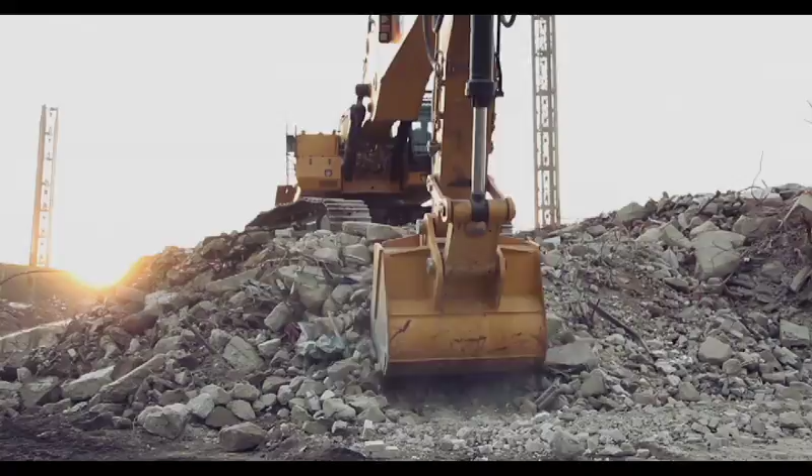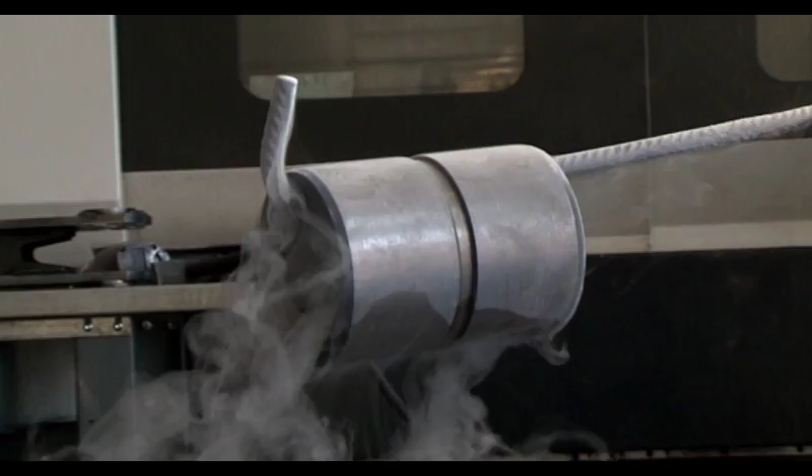The story of Alcar is one which has deep roots ingrained in the best of Italy, that which invents and innovates. Alcar is the result of the fusion between CTM, Costruzioni Termomeccaniche Meridionali, with Alcar S.p.A. of Valle in 2005. Two companies who have always associated their name with mechanics and light, medium and heavy mechanical and metalwork fabrication.

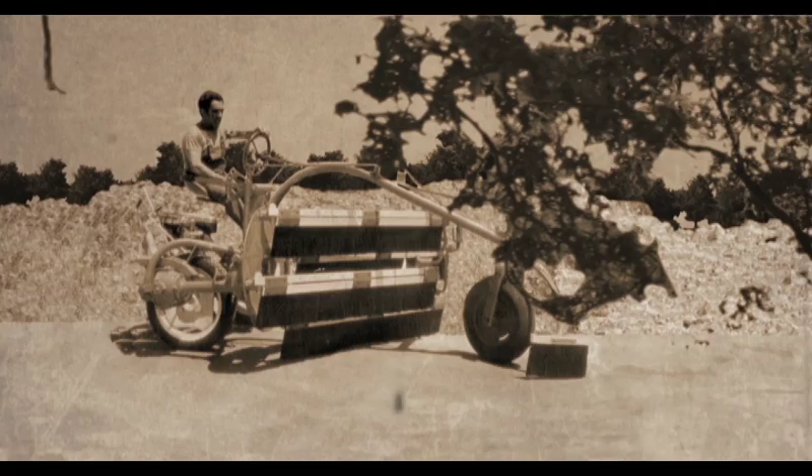CTM has manufactured conveyor belts, cranes and special machines for processing tobacco and the collection of olives in Puglia since 1960, over time becoming one of the main suppliers of Fiat Allis, today's CNH.

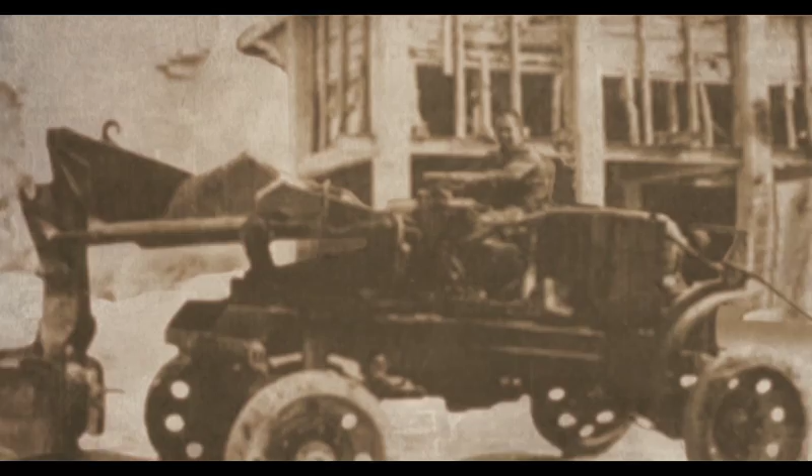Alcar S.p.A. belonged to the Bruneri family, a family which eternally linked its name with the world of earth-moving machinery. It was the Bruneri brothers who invented the first fully hydraulic excavator in the world in 1948.

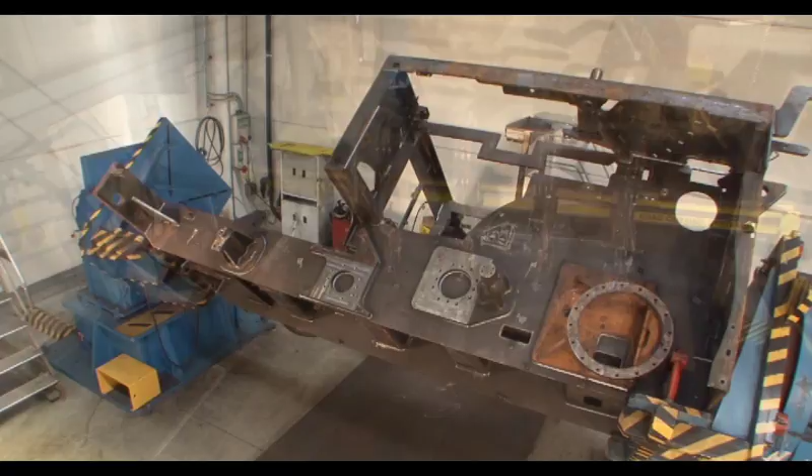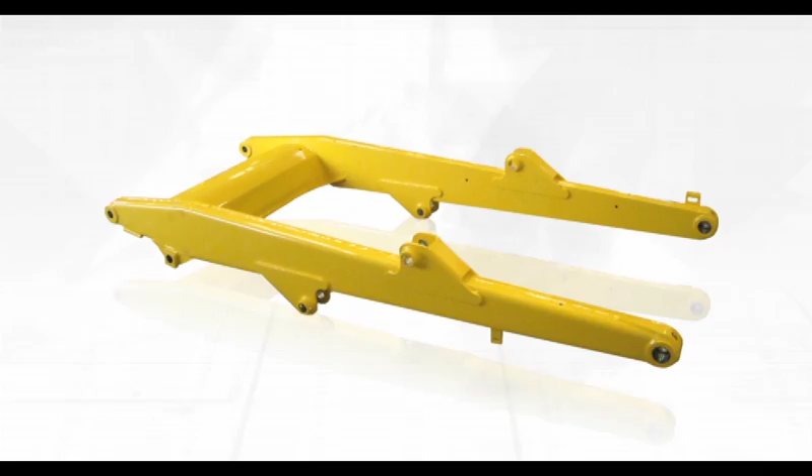Today, Alcar has become one of the European leaders in mechanical and metalwork fabrication for construction site machines. This is the only company in Europe which has a complete internal production cycle. In this manner, any component can be designed and realized independently for our clients.

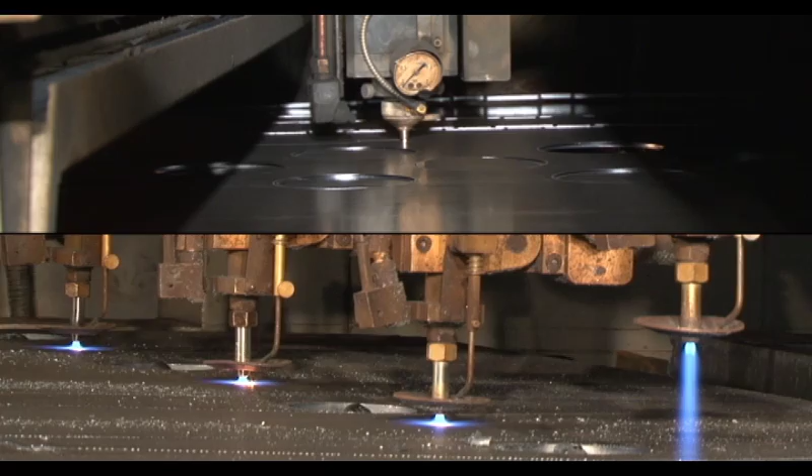But let us proceed in order. Today, Alcar has two plants, one in Valle, in the province of Turin, which manufactures the light mechanical and metalwork fabrication, and one in Lecce, which is for medium to heavy mechanical and metalwork fabrication. The internal management of all of the productive processes, together with the ability to design each component and each processing cycle, has created a virtuous circle.

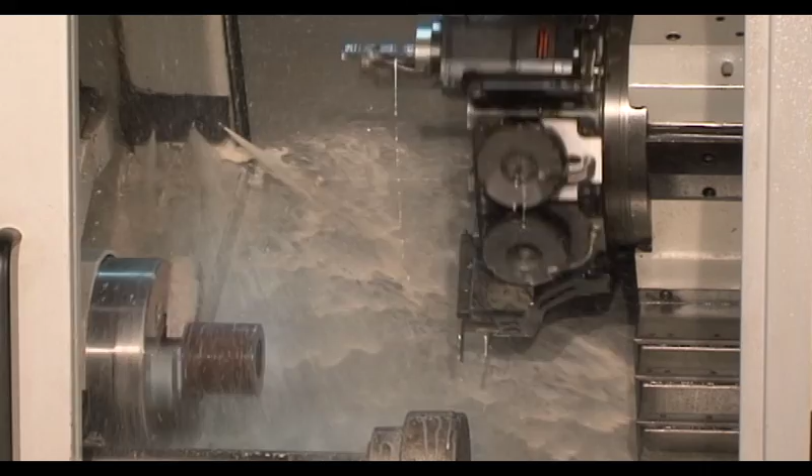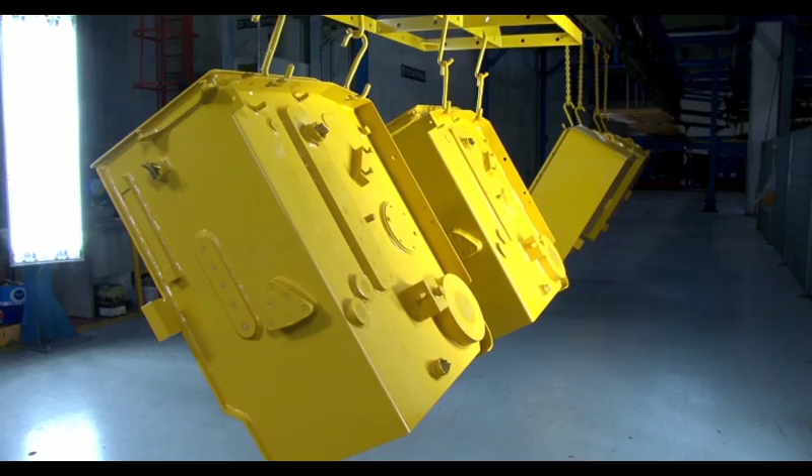On this path of continuous improvement, the increasing expectations of the clients, who are leaders in their own sectors, meet a continued and positive response. Today, Alcar counts CNH, Fiat Group, Caterpillar, Liebherr, Olot, Turk Tractor and Sampierana amongst its clients.

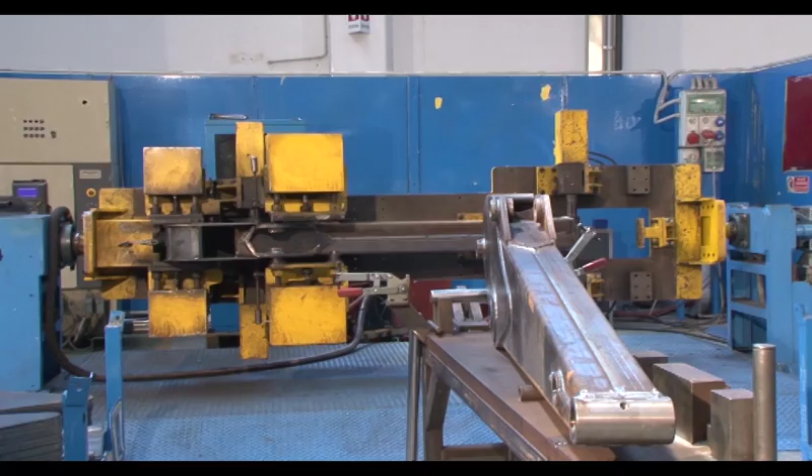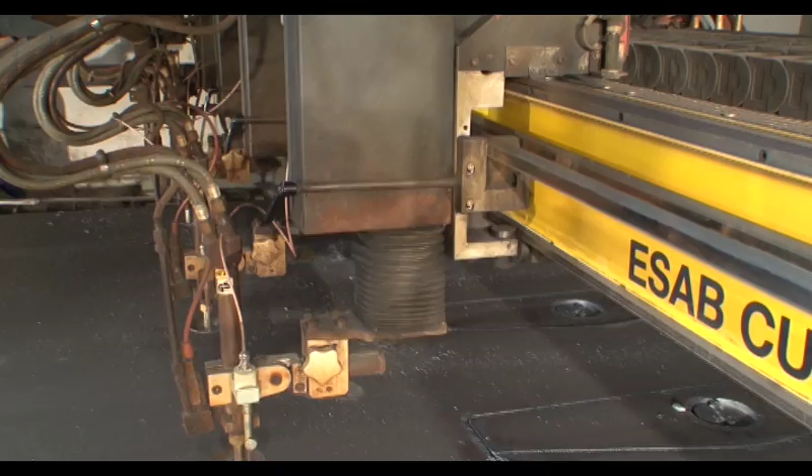In today's markets, which are always challenging and dynamic, Alcar has demonstrated that it knows how to start and above all modulate new productions thanks to a continued interaction between its design department and that of its clients, creating co-design and co-engineering activities. It often occurs during the research and development activity that Alcar not only flanks but substitutes its client, releasing them from burdensome and complex activities.

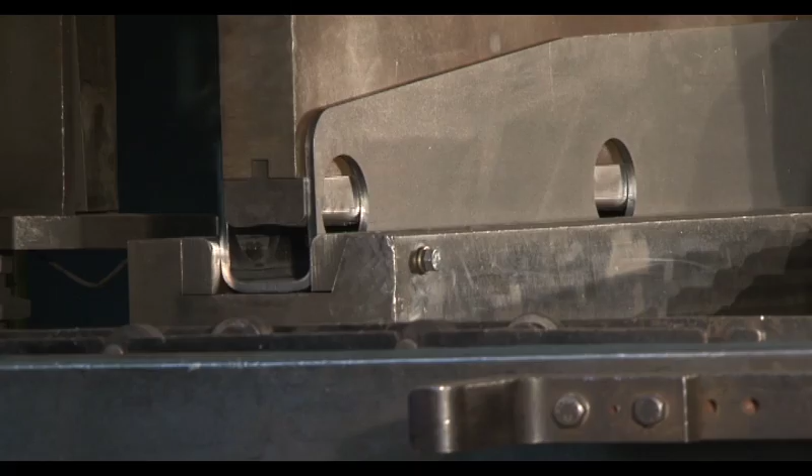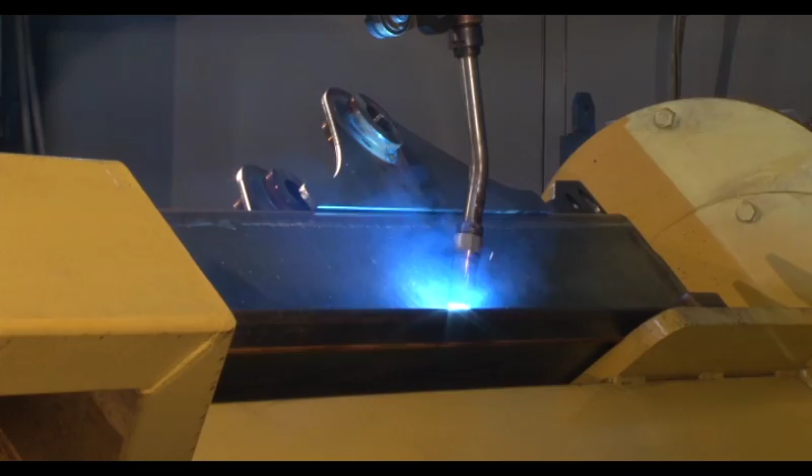The possibility of internally managing each work cycle allows the production times and costs that are positively influenced, simultaneously increasing the level of quality of the finished product.

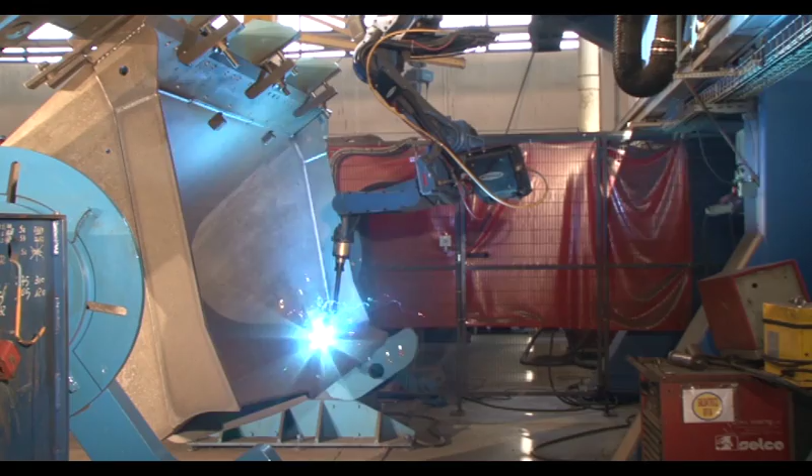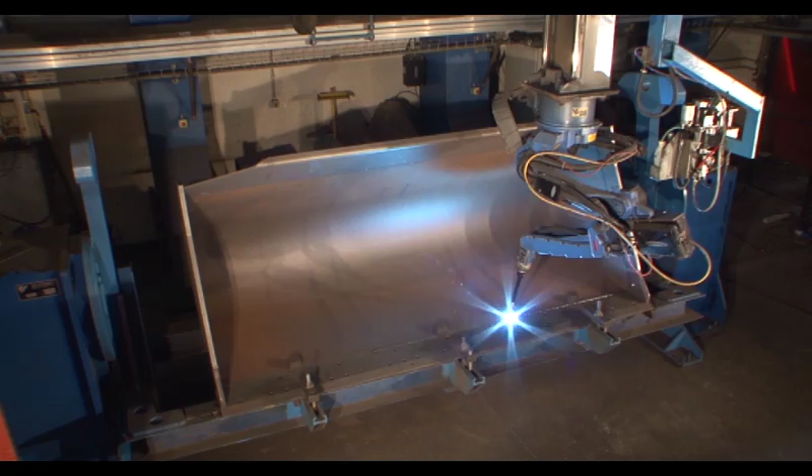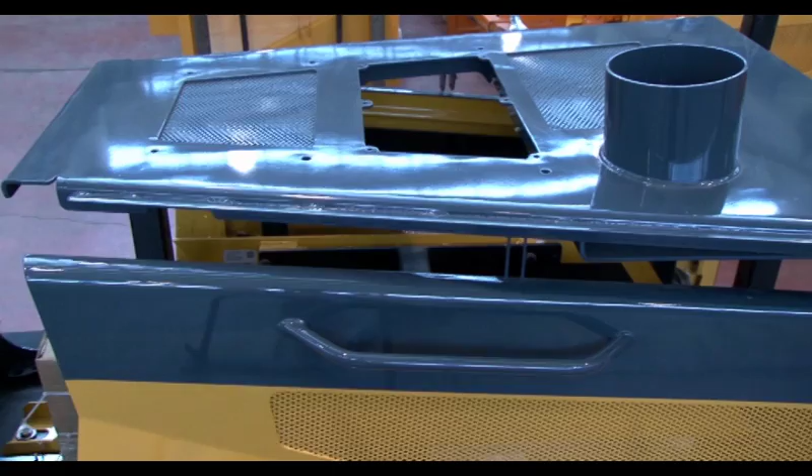The Six Sigma methodology is constantly applied in Alcar and guarantees excellence in service from the point of view of continued optimization. The core business of the company is supplying clients with the finished component, painted, ready for assembly on their lines. The level of enrichment and the component service connected to the products which exit the Alcar plants on a daily basis have reached heights which were at one time unthinkable.

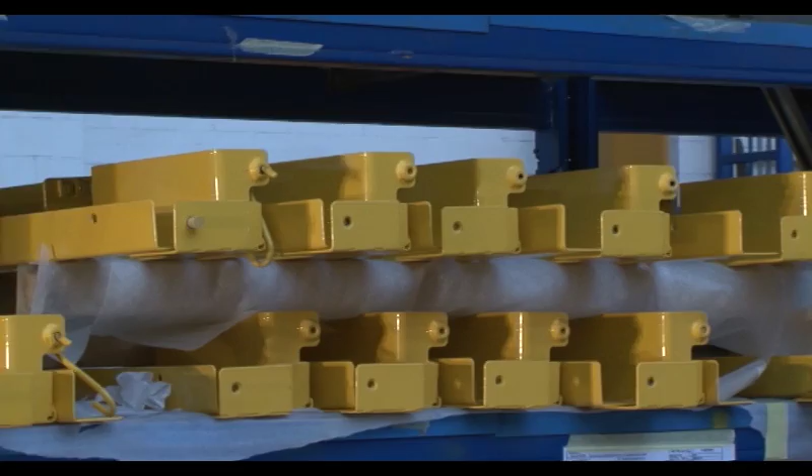The technology present in both plants is mutually integrated. Today, Alcar is the only European company able to supply mechanical and metalwork fabrication components which range from the structural to the mechanical and metalwork fabrication bodywork and tanks.

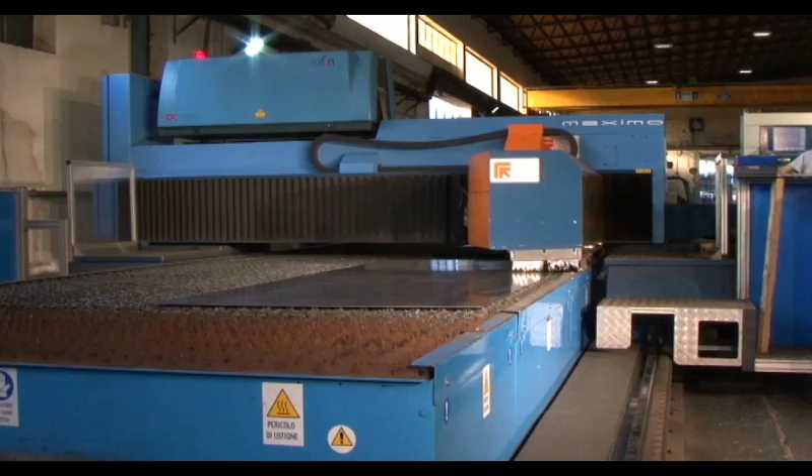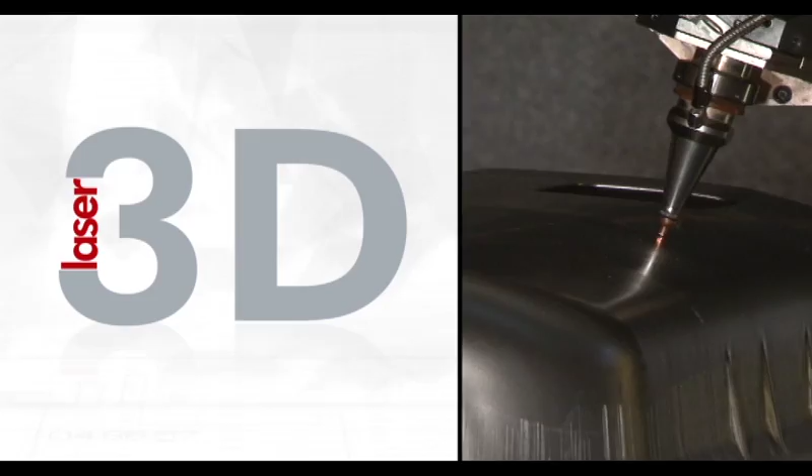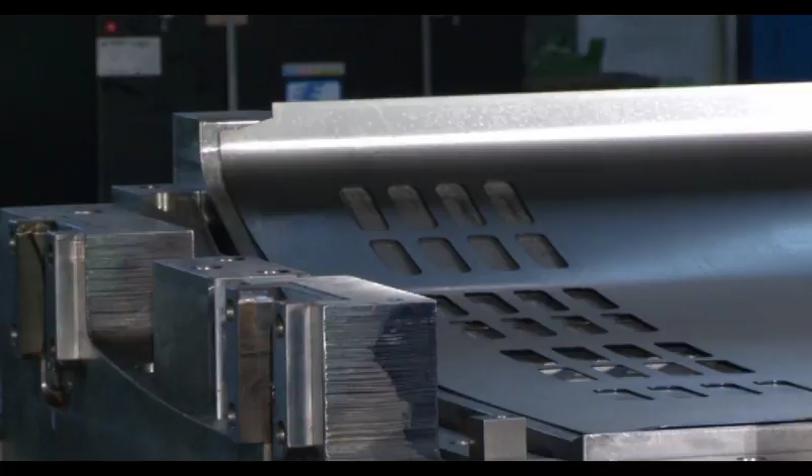Let us look at all of the productive processes in detail. Defined as the production cycle, the process starts with the preparatory phases of the raw material. This is followed by the cutting of the plates, which, depending on the thickness and the characteristics of the product requested, is carried out using different types of technology: 2D and 3D laser, flame cutting, plasma. This is followed by bending phases, which may be robotized, and the stamping phase carried out with presses which reach 800 tons. The component is welded manually as well as with modern robots.

At this point, the machining process, or the phosphating, occurs, if foreseen by the manufacturing cycle. In specific cases, such as tanks or bodywork, cleaning, painting and enrichment are foreseen. Once the productive cycle has been completed, a rigid testing and commissioning procedure begins, which guarantees and confirms the made in Alcar quality for the client.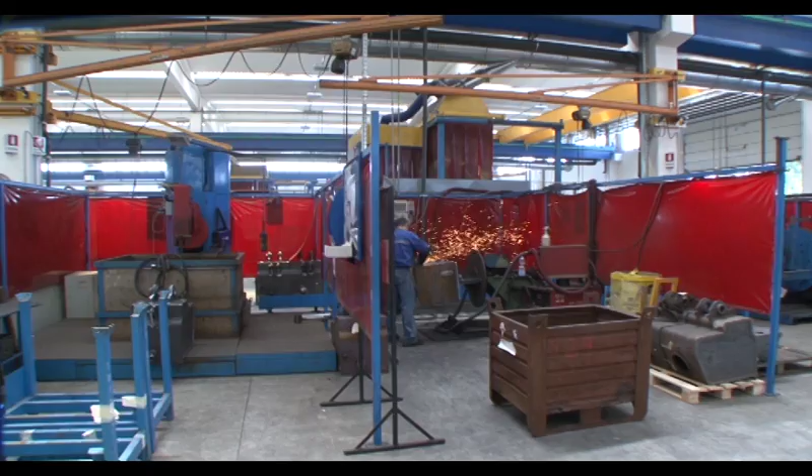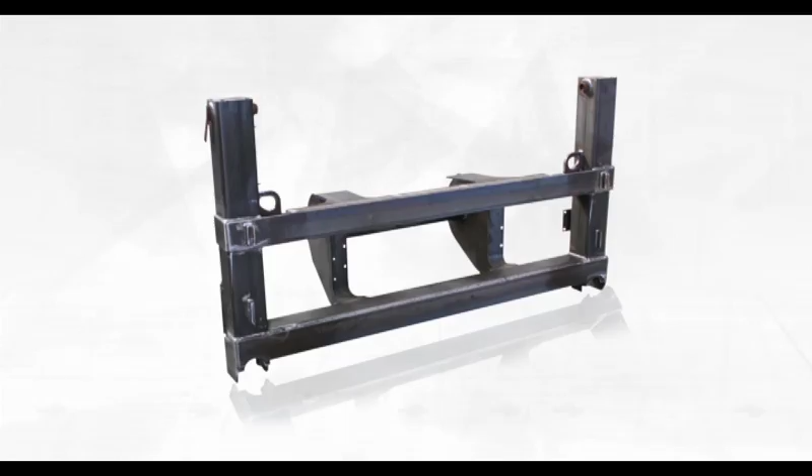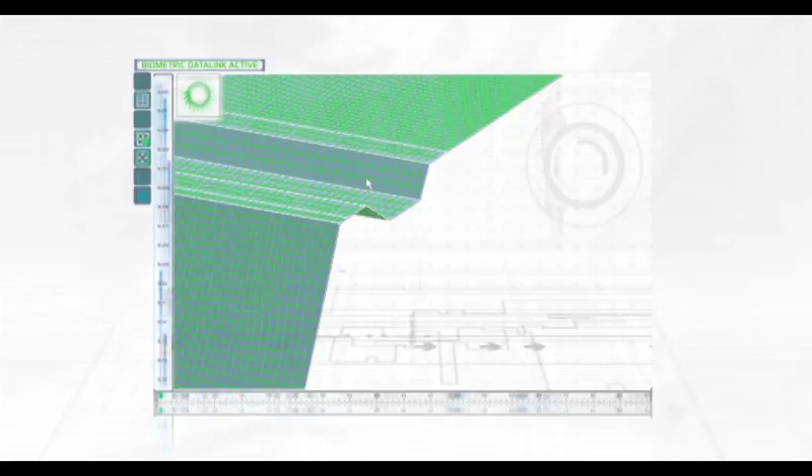Let us look at each phase individually. The client is supported and assisted during the most delicate part of the design phase, such as the realization and the engineering of new products or the improvement of existing products in order to optimize both the service and aesthetic level of the product as well as its cost. The project passes through the FEM structural analysis, the dynamic multi-body or fluid dynamic systems, to arrive at the 3D modeling which are specified in the realization of the executive table.

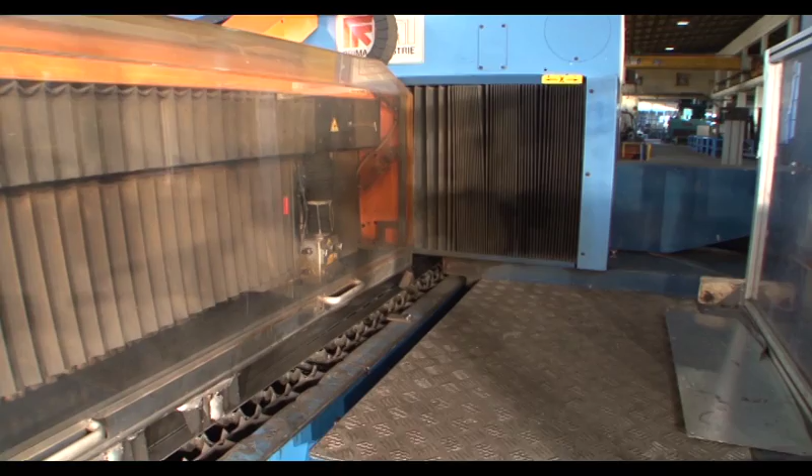The first phase of the productive process is the cutting of the sheet. Alcar has employed the bidimensional and tridimensional laser cutting technology since the beginning of the 1990s.

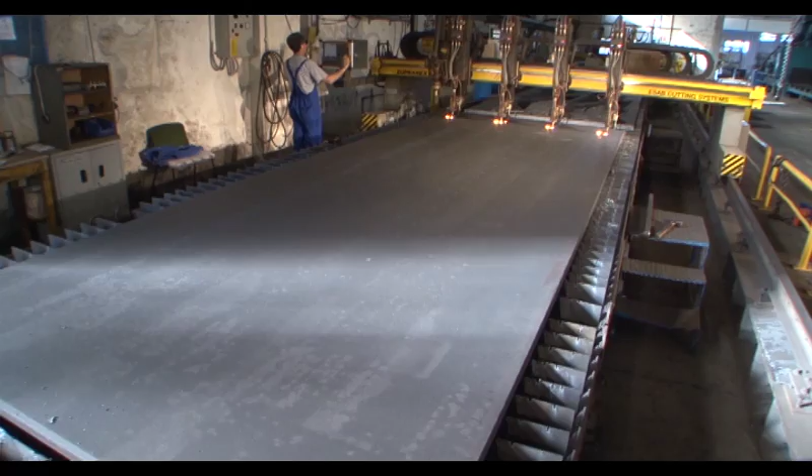Beyond the laser technology, the company also has flame cutting and plasma systems in order to optimize each individual productive request. The laser cutting system is employed for thicknesses up to 25 millimeters, with bench lengths of 3 meters by 1.5 up to 16 meters by 4.

The thermal cutting system is employed for thicknesses of 20 to 120 millimeters for a maximum size of 3 by 12 meters. The presence of a plasma torch, which works in combination, increases the flexibility of this system.

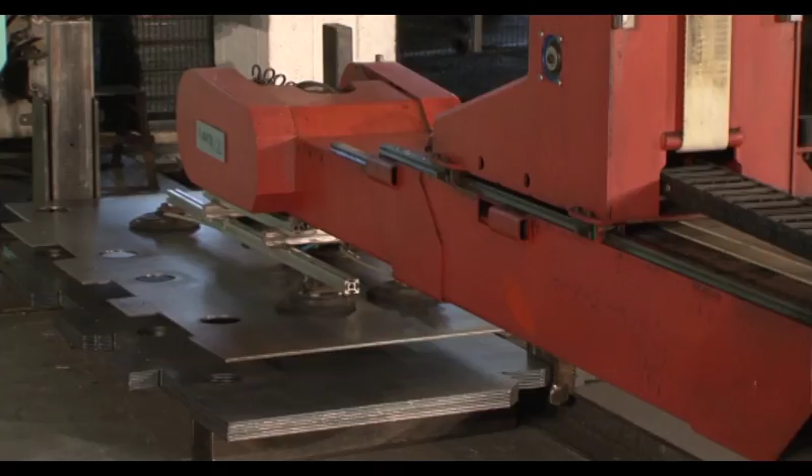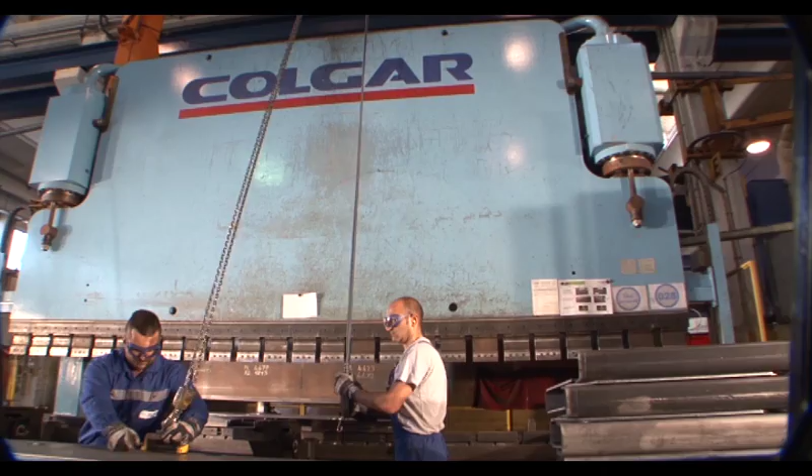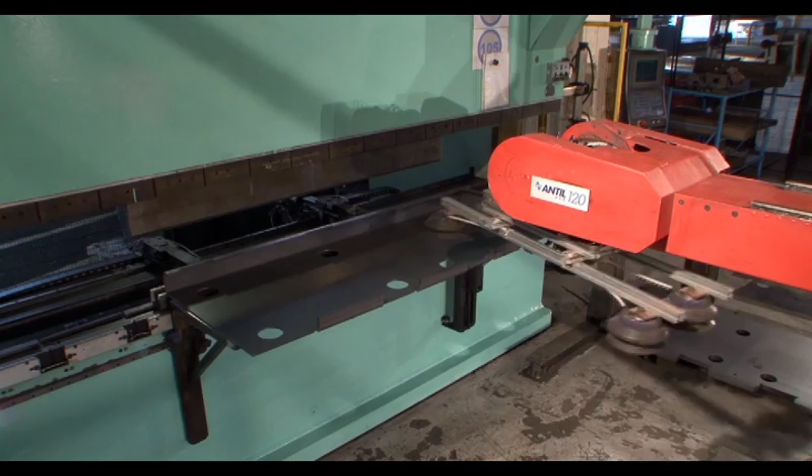Once cut, the plate is bent following a number of preparatory phases, if foreseen, such as burring, beveling and puncturing. Alcar employs presses which reach up to 800 tons with a maximum bending length of up to 6 meters. The use of robotized systems for the automation of the bend, with a capacity of between 120 and 250 kilograms, and the control of the relative angle, significantly increases the efficiency of this process phase.

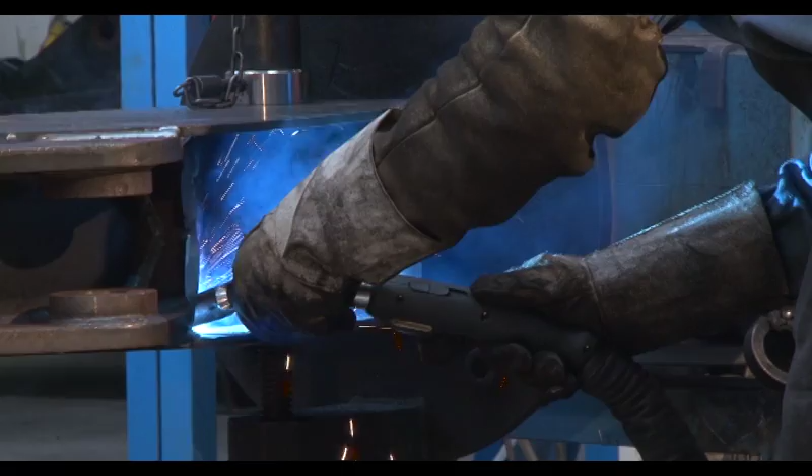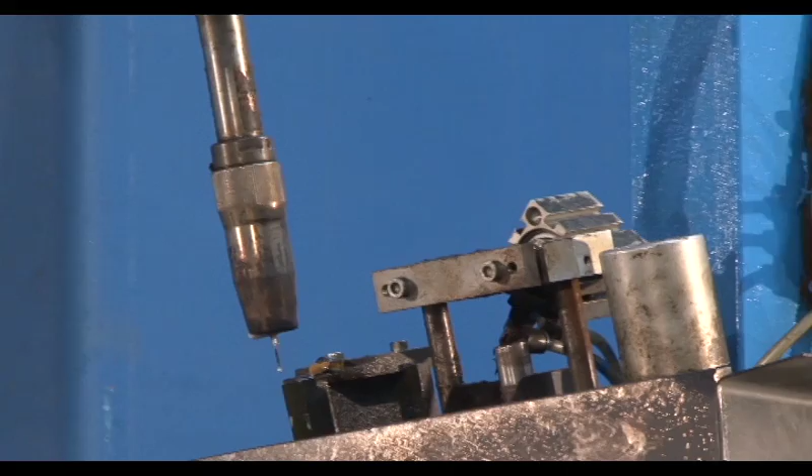The component welding phase starts after the bending. Here, one of the most delicate phases is carried out in the specific departments. The technology used is MIG-MAG arc welding with continuous wire welding. Alcar has approximately 50 robotized systems which allow it to reach elevated levels of productive capacity. Each robotized island has a seam finder and seam tracking system with both a technological laser and electric impulses.

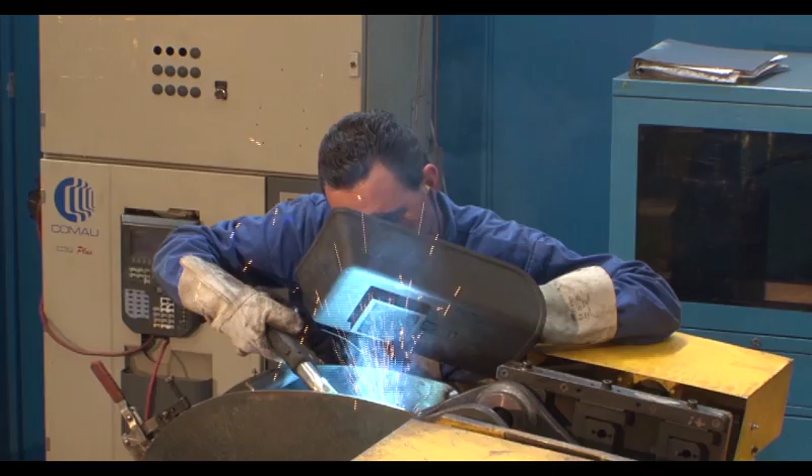The robots are flanked with over 200 manual stations in which specialized welders work, all of whom possess the necessary UNI-EN ISO 287 certification.

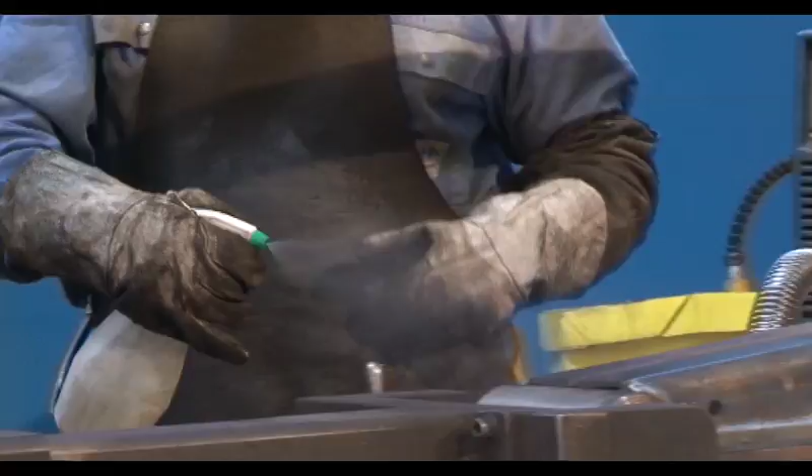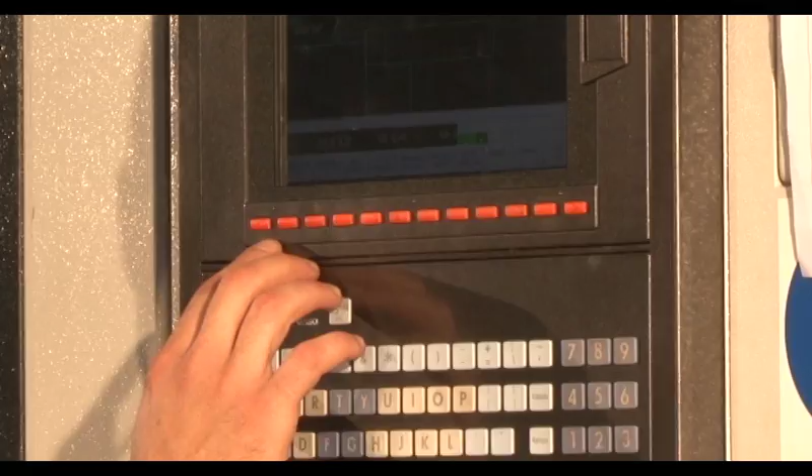The machining process department, concentrated in the plant in Lecce, allows a highly varied range of operations to be carried out. The machine park is composed of CNC turning, boring and milling machine high-speed work centers.

The sealing tests and phosphating tests are carried out after the above-mentioned phases, depending on the production of the tanks. Both are carried out through independent immersion systems that guarantee excellent quality results.

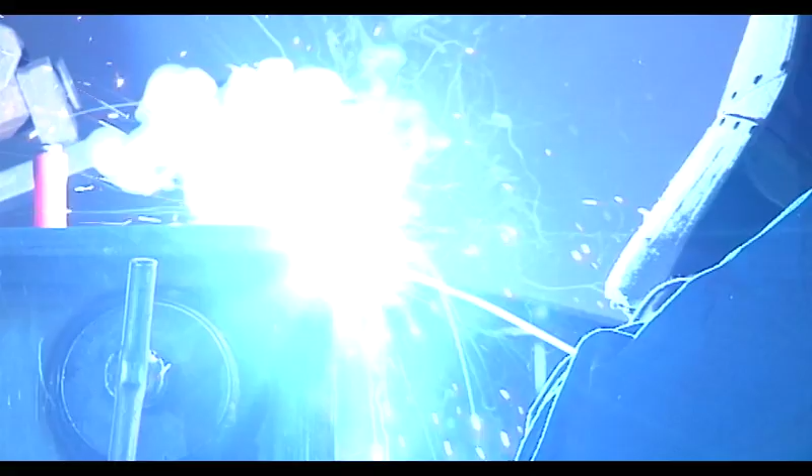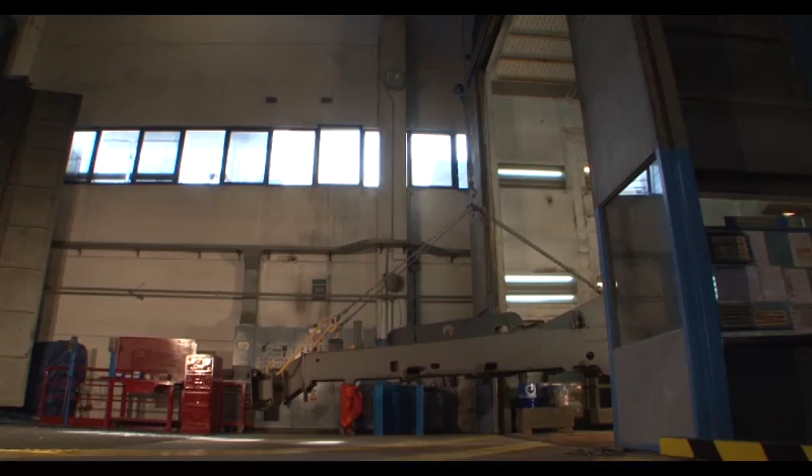Following on from the productive process, the light mechanical and metalwork fabrication components then continue with the cleaning process to guarantee the absence of aesthetic defects on the surface to be painted. When these various processing phases are completed, the light or medium-heavy mechanical and metalwork fabrication is ready to be painted.

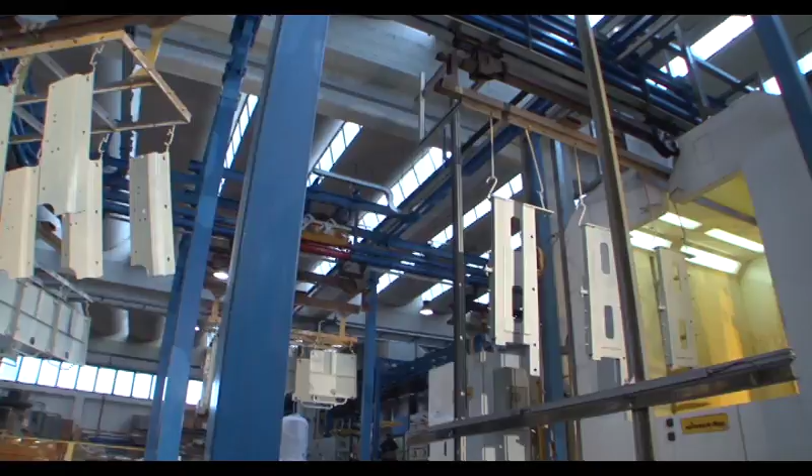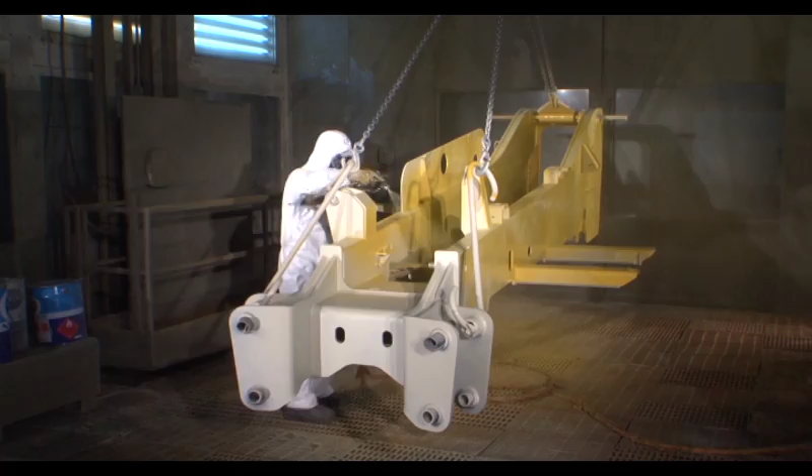Alcar has 3 painting plants, of which 2 are in Lecco and 1 in Valle. In Lecco, the presence of a large liquid painting system, which is able to handle pieces up to 6 tons in weight, allows an elevated standard to be produced in respect to the environment. This objective is reached by employing technology which is able to use water-based paint.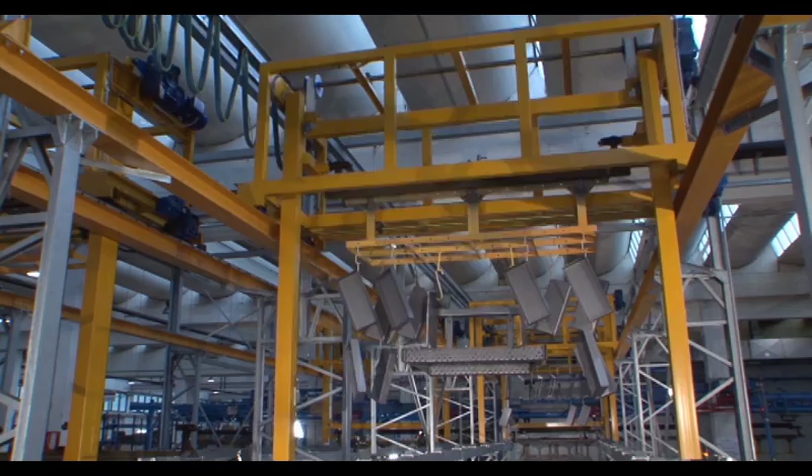In Valle, given the different types of products built, a sophisticated system with an overhead box conveyor, automatic loading and unloading cell, pre-treatment tunnel through phosphor degreasing, primer application cabin, 3 powder cabins, of which 2 are automated, and the relative drying and flash-off ovens has been installed.

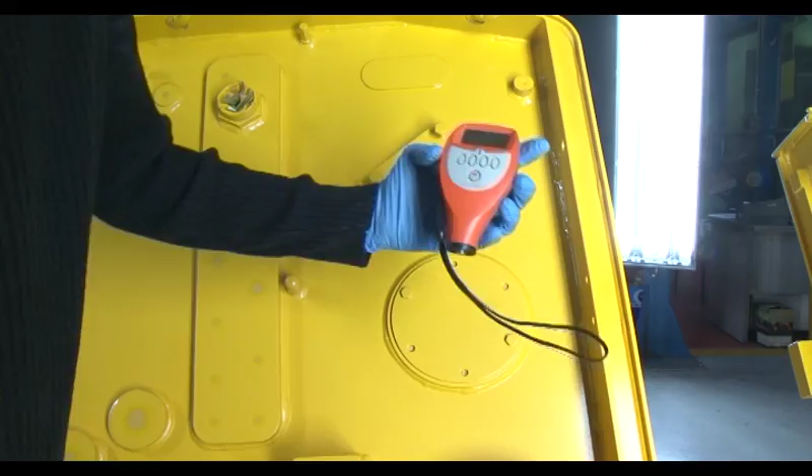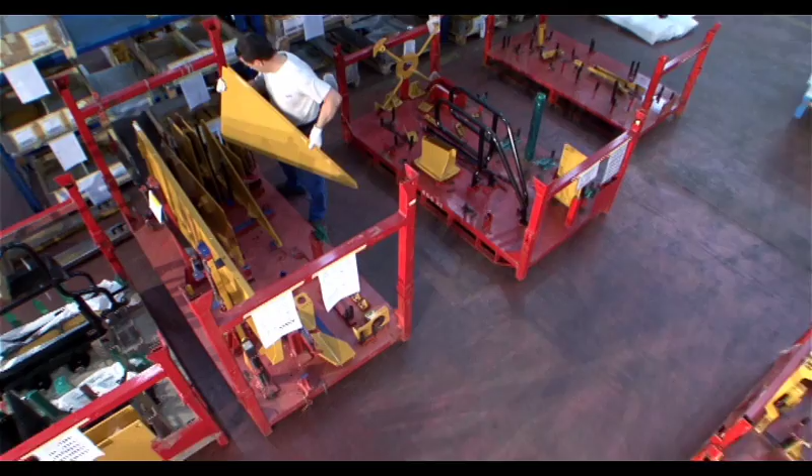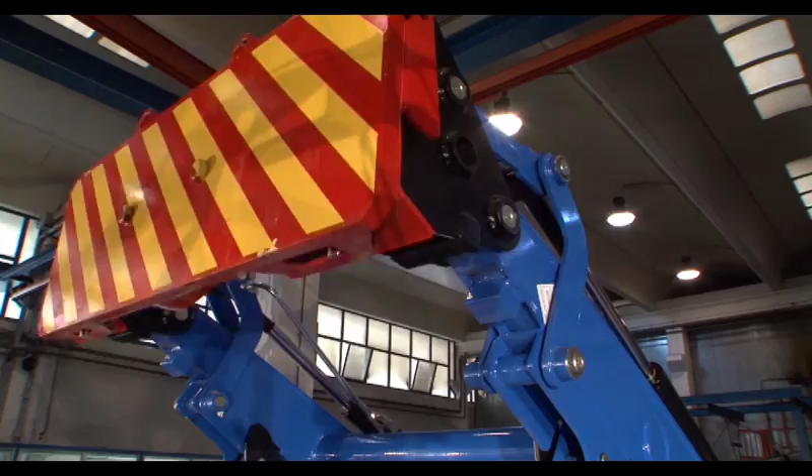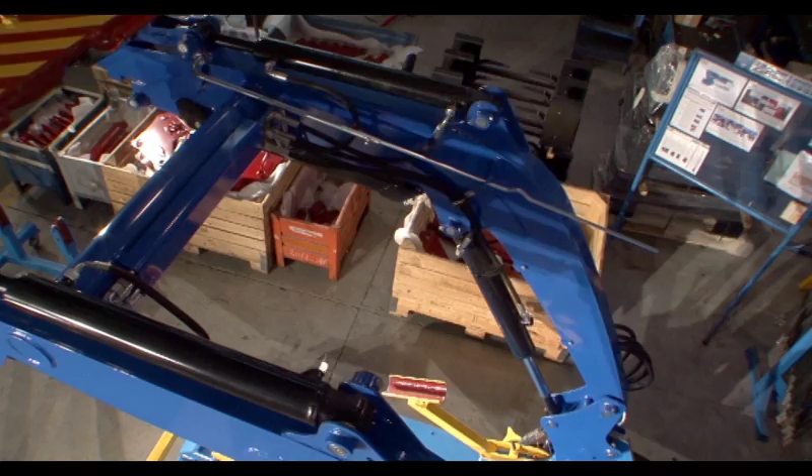Specific tests employing hydraulic components are carried out on products to simulate the same conditions as their final use before shipping, reproducing the strain and the stress to which the component will be subjected during the normal life cycle. This is the manner in which the operating quality of the product is guaranteed.

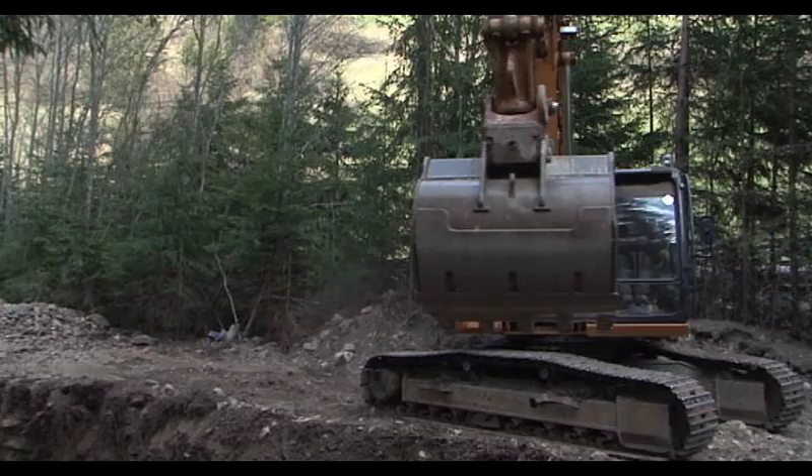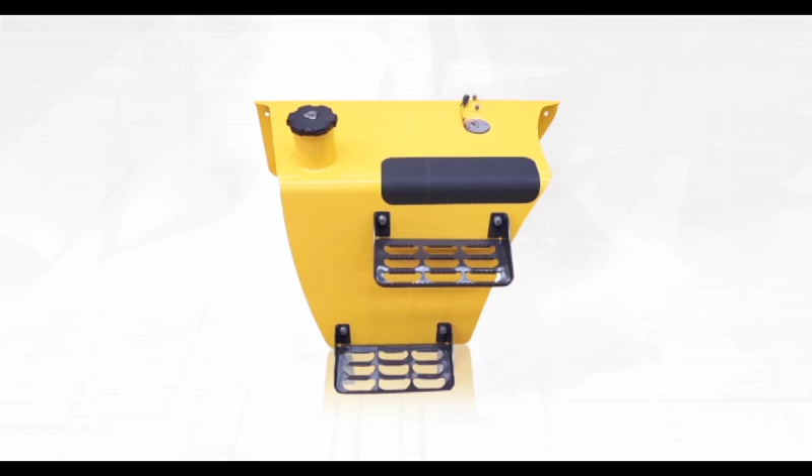Alcar works in a number of different sectors: earth-moving machines, agricultural machines, lifting systems. The range of products is also complete and includes light structural work to medium-heavy structural.

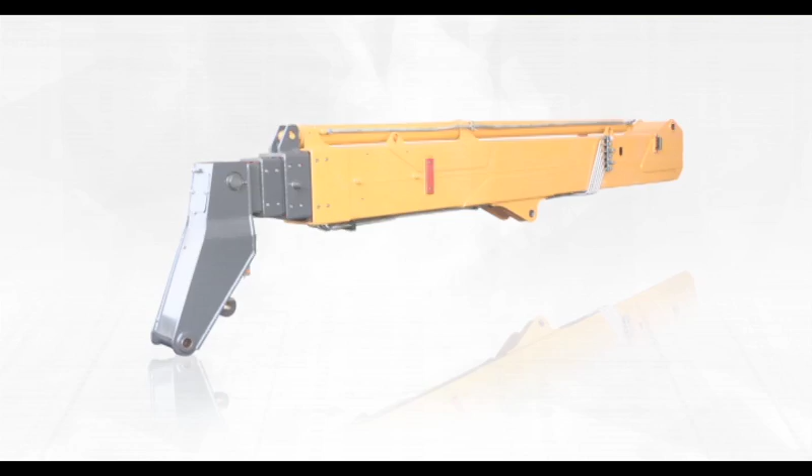In the medium-heavy sector, Alcar currently produces the loading arm, the digging arm, the frame and the bucket of the backhoe loader, the telescopic arm of the telehandler, the pushing arm of the bulldozers, the frame of the paver, the loading arm of the agricultural tractor, the frame of the mini excavators.

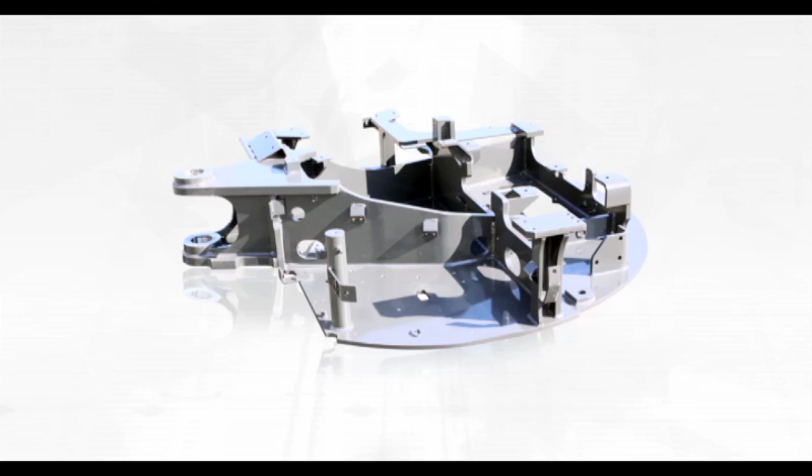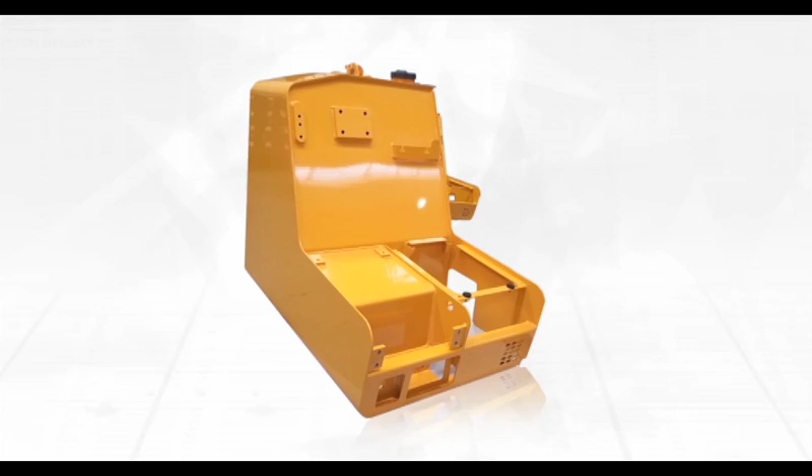The main light mechanical and metalwork fabrication products are represented by bodywork kits and by tank, oil and gas oil kits for machines such as backhoe loaders, large wheeled and crawler excavators, wheel and crawler loaders, and pavers.

Alcar. How to get from a simple idea to a finished component without having to think about it.